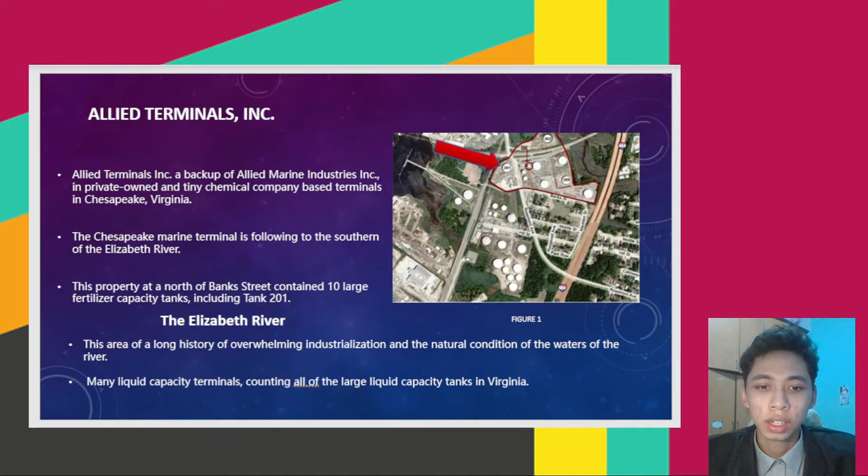The Elizabeth River. This area has a long story about overwhelming industrialization and the natural condition of a river. Many liquid capacity terminals, counting all the large liquid capacity tanks in Virginia. This is the image from Google Maps. You can see the company based beside the river, Elizabeth River.

There are two companies associated with this collapse. The first one, HMT Inspection Inc. It's a capacity tank provider based in Houston, Texas. HMT performs tank audit, non-destructive examination, and building measure with the requirement of American Petroleum Institute API Standard 653.

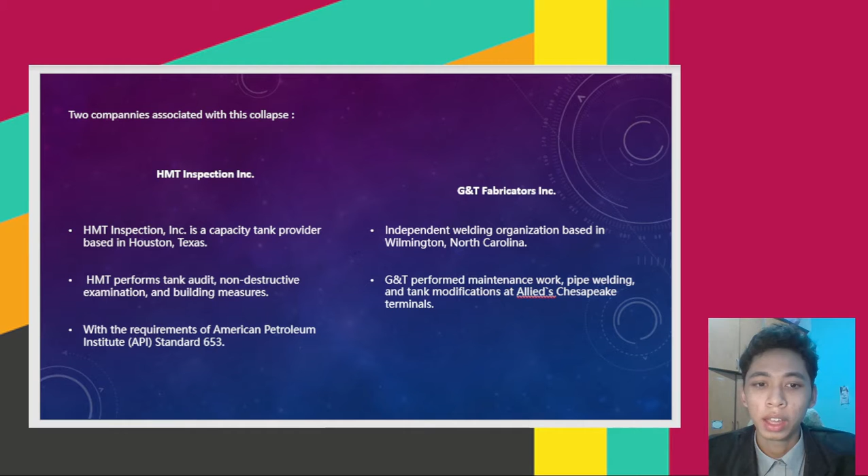The second company is G&T Fabricators Inc., the independent welding organization based in Wilmington, North Carolina. G&T performs maintenance work, pipe welding, and tank modification at Allied's Chesapeake Terminal.

The next is a classification of the accident, the catastrophic tank collapse. On the day of the accident, tank 201 was filled with fluid fertilizer to check for spillage early in the tank. On the tank, a welder and his helper were fixing the leaking rivets on the tank during the filling.

At almost 3.5 inches under the max fluid level or the safe fluid level, the tank split vertically and opened at a flawed weld found halfway of the tank. The welder and his helper were at the opposite side of the tank. Both were injured due to immersion within fluid fertilizer and the collapsing tank. The effect is at least 200,000 gallons of the fluid fertilizer not recovered, and some went to the Elizabeth River.

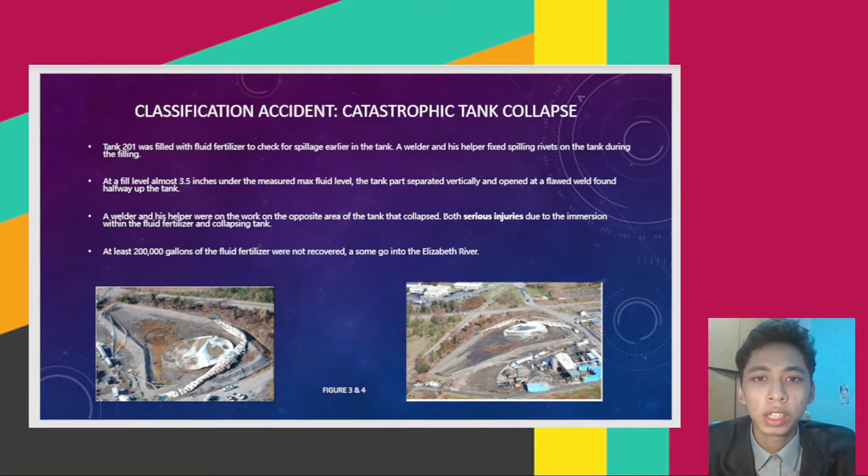So, the detail of the accident. Tank 201 was originally designed in 1929. It was almost 30 feet high and 116 feet in diameter. It's built for petroleum storage. The shell was made of riveted plates, each around 14 feet long and 6 feet high. You can see in figure 5 the tank 201 before any modification.

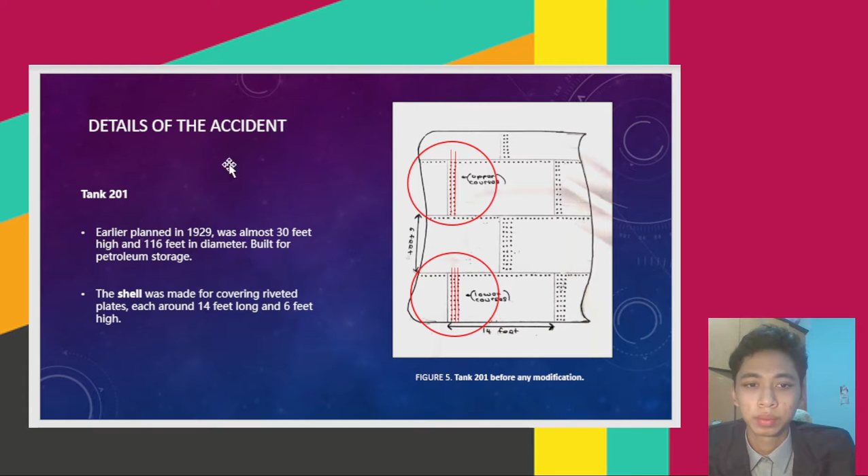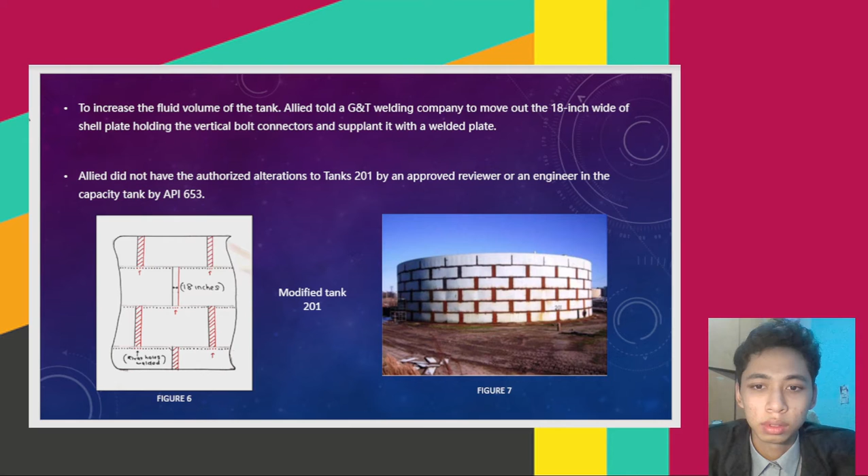But the company wanted to increase the fluid fertilizer volume of the tank. Allied told the G&T welding company to remove the 18-inch wide overlap of every shell plate holding the tank. But Allied did not have an authorized alteration to tank 201 by an approved reviewer or engineer following the requirement of API 653.

The immediate cause of the accident. Tanks are more likely to fail when being filled to the highest level. The second is the incorrect weld procedures. And the last is lack of full weld penetration. You can see in the figure beside what the difference is between the good weld and the bad weld.

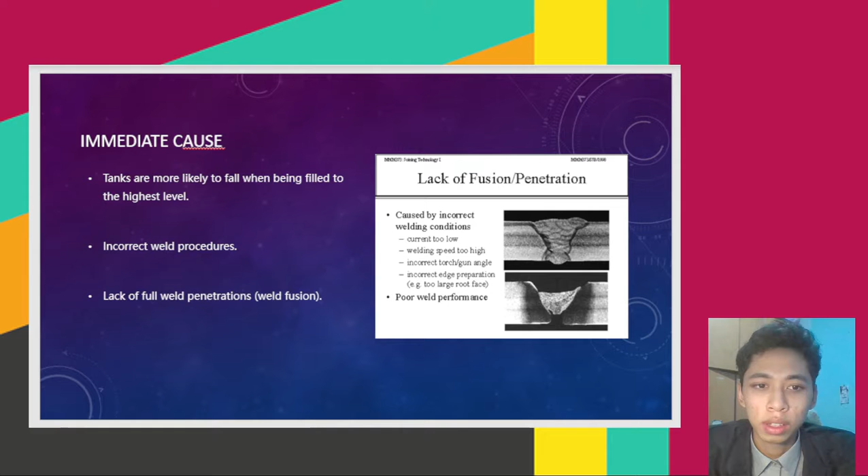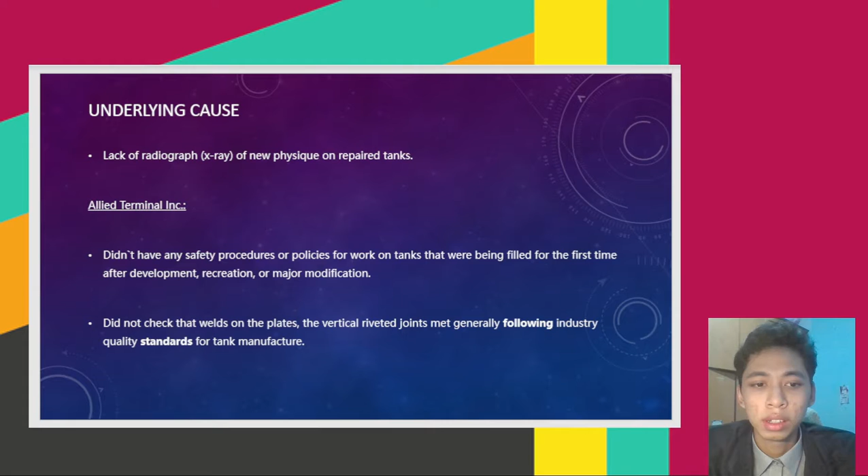So now the underlying cause. The general cause is lack of radiography or X-ray of the new welds on repaired tanks. The company Allied Terminals Inc. didn't have any safe procedure or policy for work on a tank filled to the highest level for the first time after any development, reconstruction or major modification. And Allied Terminals did not check that the welds on the plate at the vertical riveted joints met general industry quality standards for tank manufacture.

Next is the root cause analysis. Number 1, Allied did not have the authorized modification to tank 201 by the examiner or the constructor of the capacity tank. Number 2 is G&T did not use qualified welders and weld methods to perform the change in accordance with the ASME Boiler and Pressure Vessel Code, Section IX, welding and brazing qualification.

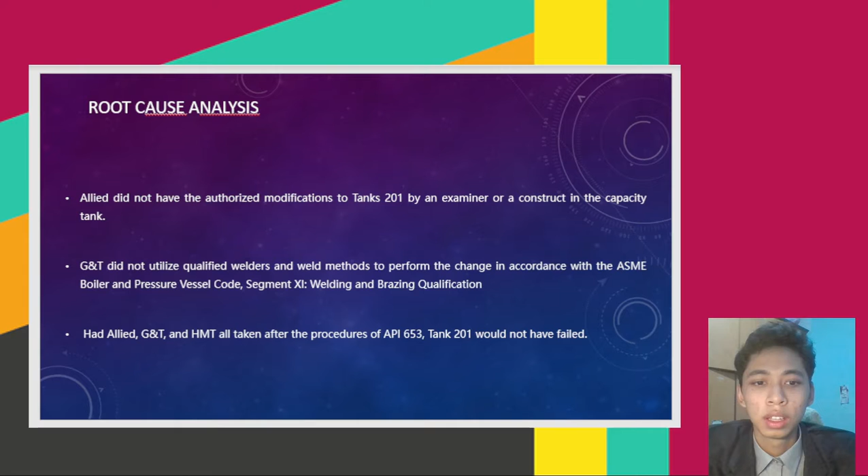Number 3 is if Allied, G&T and HMT had all taken all the procedures by API 653, tank 201 would not have failed. So next, there are some corrective actions taken. Firstly, a visual test of the tank 201 to detect any damaged welds.

In tanks 202, 205 and 209, they found numerous welding defects because there were similar alterations to tank 201, including weld undercuts and undersized welds. Tank 209 was found to be near failure and disapproved on December 22, 2008, by the City of Chesapeake. After that, the company needed to drain the tanks within 30 days to make sure no accident can happen.

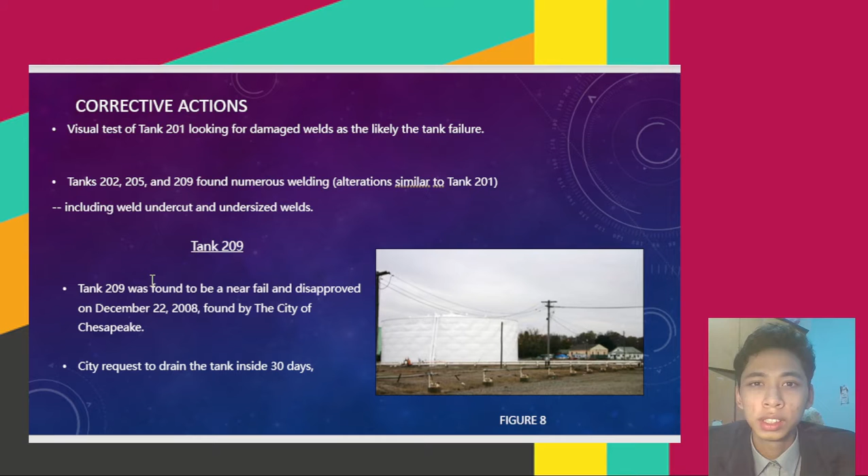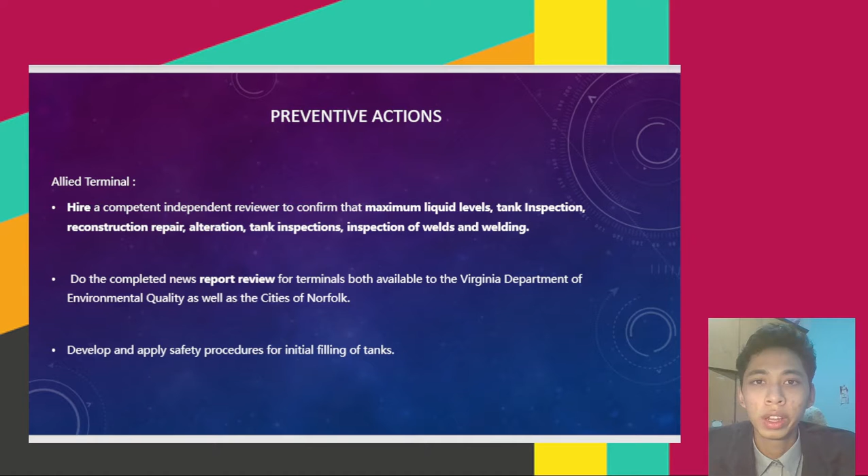Now, the preventive action. Allied Terminal hired a competent independent reviewer to confirm the maximum liquid levels, tank inspection, reconstruction, repair and many more. Number 2 is do a complete report review for both terminals, with the Virginia Department of Environmental Quality as well as the City of Norfolk. Number 3 is develop and apply a safety procedure for initial filling of the tanks.